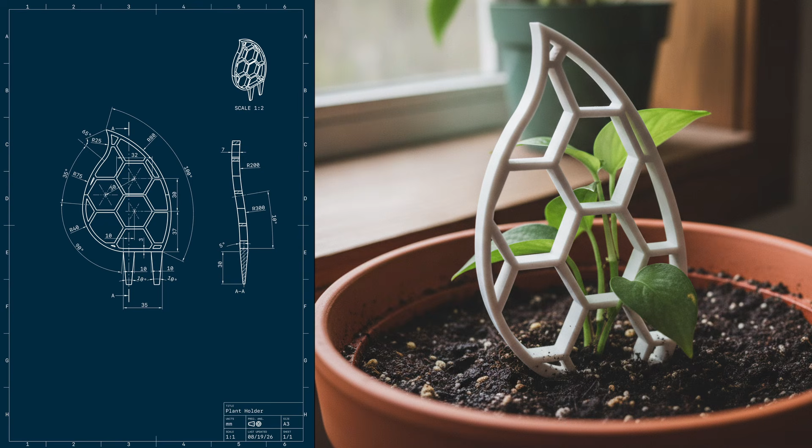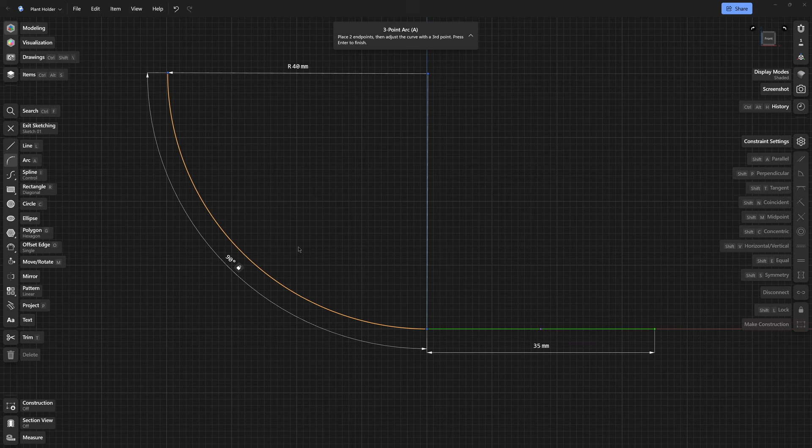First step is creating a sketch. Select a plane and select a line and draw a horizontal line of 35 millimeters. Next step is to create an arc. Let's just follow the drawing and create an arc with 90 degrees and 40 millimeters radius. Next arc is 45 degrees, 35 degrees and 75 millimeters. Next one is 65 degrees and 25 millimeters.

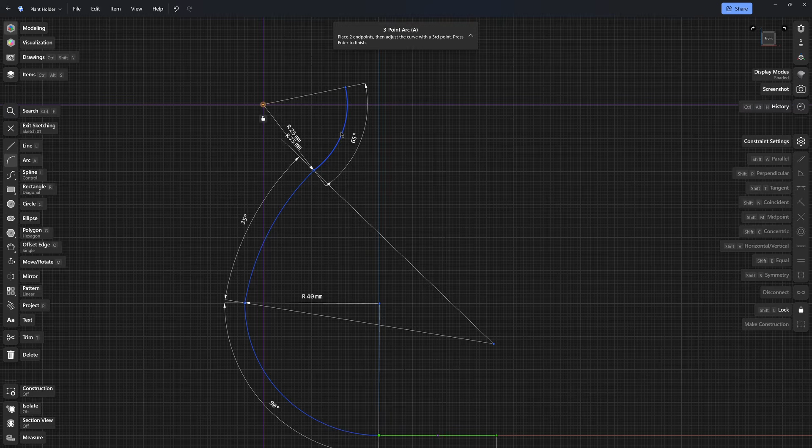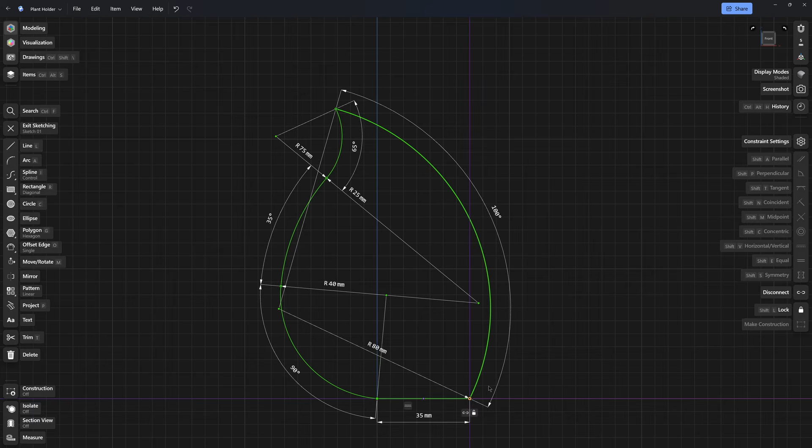And before the last one, let's add a tangent constraint. And now let's draw the last arc. It's 100 degrees and 80 millimeters radius. And now just snap the point to the horizontal line and the drawing is completely constrained. So now we can perform an extrude on this profile, create a construction plane and start a sketch on that plane.

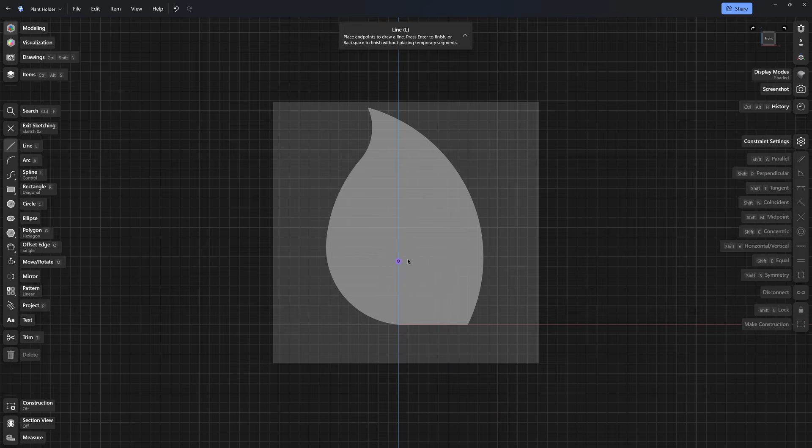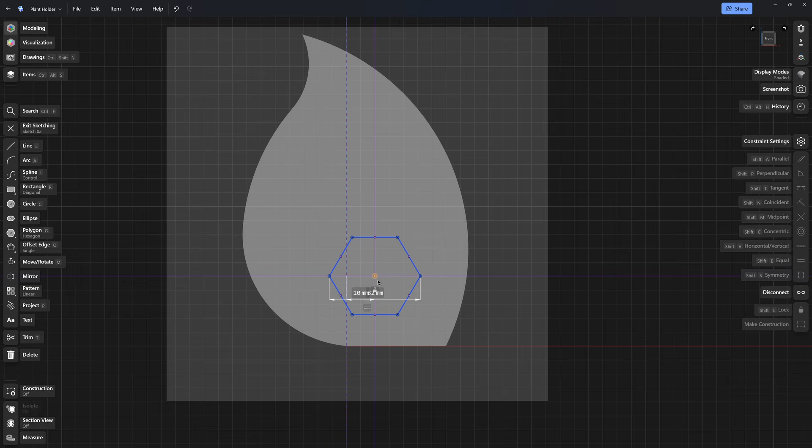We will use this sketch to create a hexagonal pattern. So pick polygon, create a hexagon and add some constraints and also dimension. It is 32 millimeters wide. And now let's define the position. So it's 10 millimeters from this edge and it's 37 millimeters from the horizontal axis.

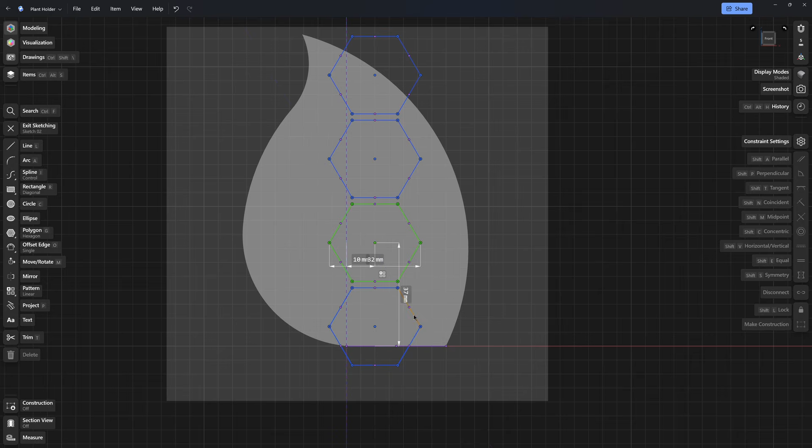Now when we have our hexagon, let's use pattern to create more of these. Distance between two hexagons is 30 millimeters. Now let's select these vertical patterned hexagons and let's start pattern again. Move the gizmo to change the direction of the pattern, and again spacing should be 30 millimeters.

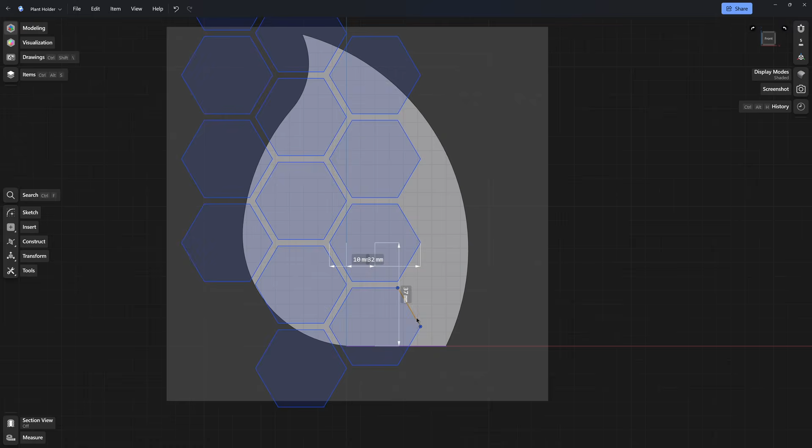There is this little room on the bottom of the leaf-shaped profile, so we need one additional hexagon, and we also need to repeat that for the right side too. So let's select hexagons, turn on pattern, change the direction of pattern and set spacing to 30 millimeters.

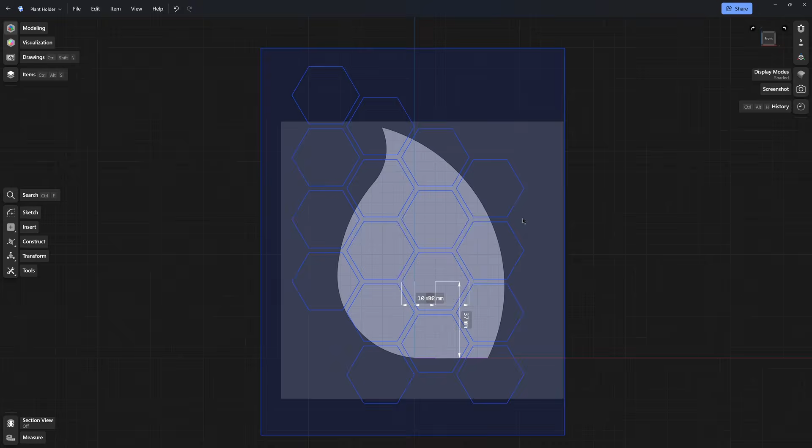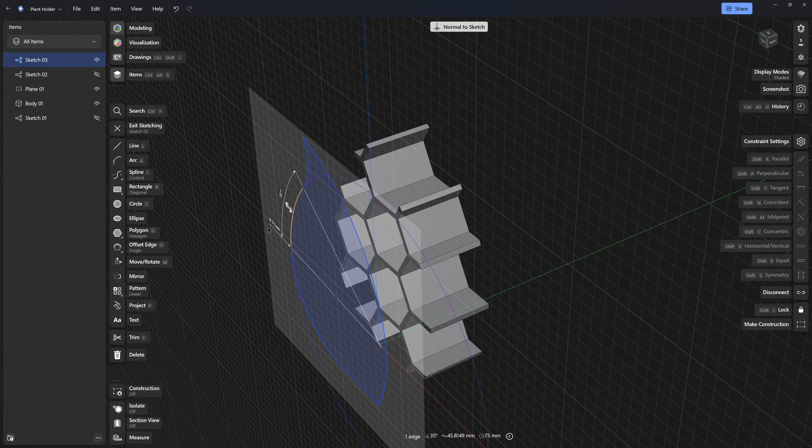After we are done with that, create a rectangle around it so it's easier for us to extrude through the body that we already created. Use Ctrl to use intersection, hide sketch so it is not in our way. Next step is to use the initial sketch and project it on the plane. Select sketch and go to offset. Change offset option to chain. So the whole profile is offset by 3 millimeters.

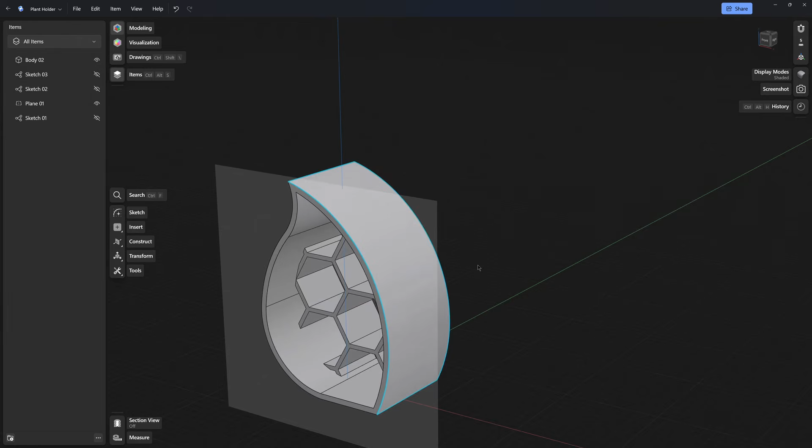When that's done, we can again extrude, but in order to avoid using union as a separate tool, we are going to use Ctrl again and union it to the existing body. Next step is to create another construction plane. On this plane we are going to sketch the side shape of the plant holder. First thing is to create a vertical construction line. So make it vertical and also set it to construction and lock it in place.

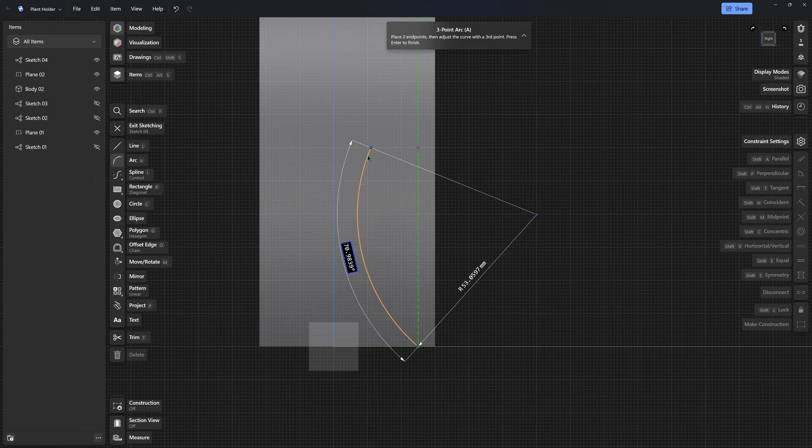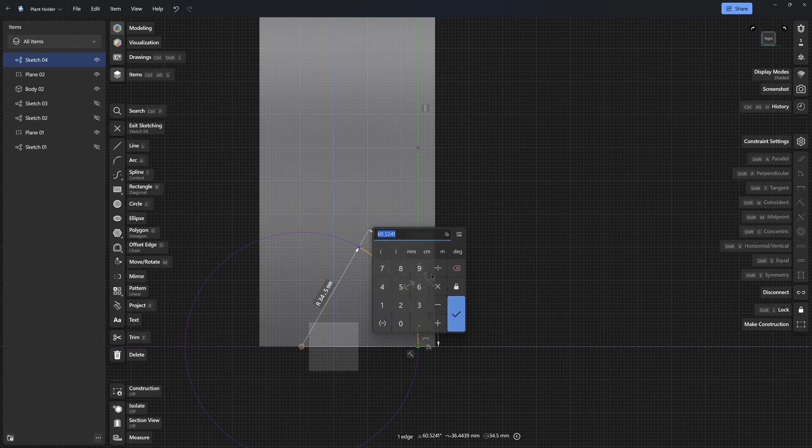Next step is to create an arc. Be careful when you snap the arc on the opposite side. It's easier to just undo and recreate a new arc than to correct the mistake. Set a constraint between the vertical line and arc and define dimensions of the arc. It's 10 degrees and radius is 300.

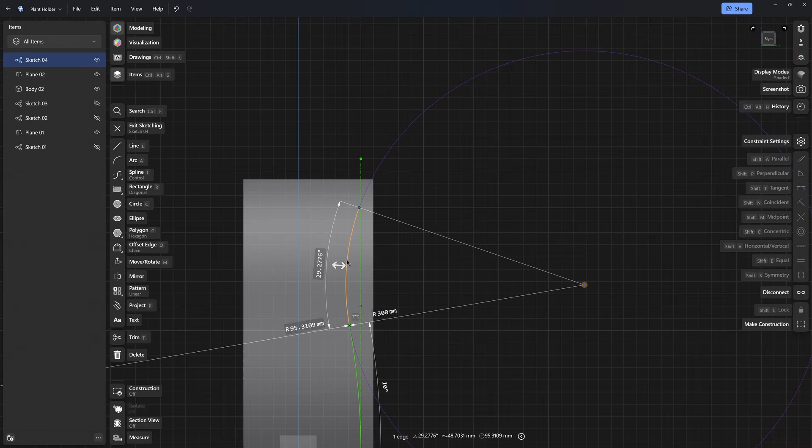And another arc should also be tangential to the previous one. So let's set that constraint and let's define dimensions. Oh, actually, the angle is not important in this case. It's only important that it is going outside of the body that we already created. So this was a mistake. It could be 100 degrees, but the important step here is to define the radius precisely.

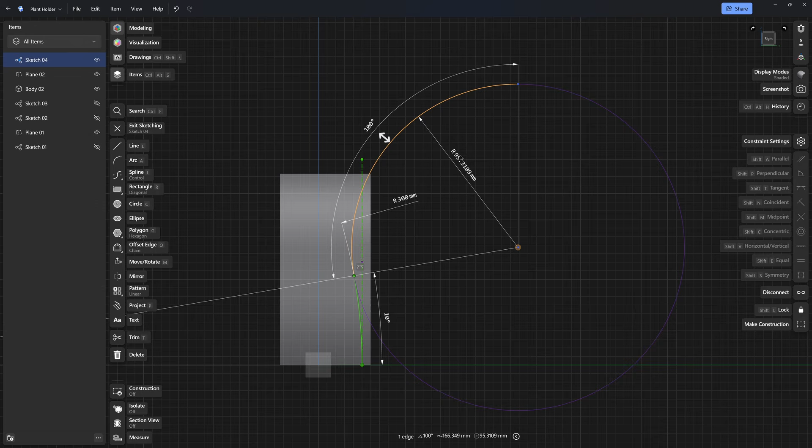So it's 300 millimeters. And now I want to offset these two arcs by 7 millimeters. But when I select offset, because it's set to chain, it will also select the vertical line. So select single and then select arcs separately and offset them by 7 millimeters. Close the profile so we can extrude it.

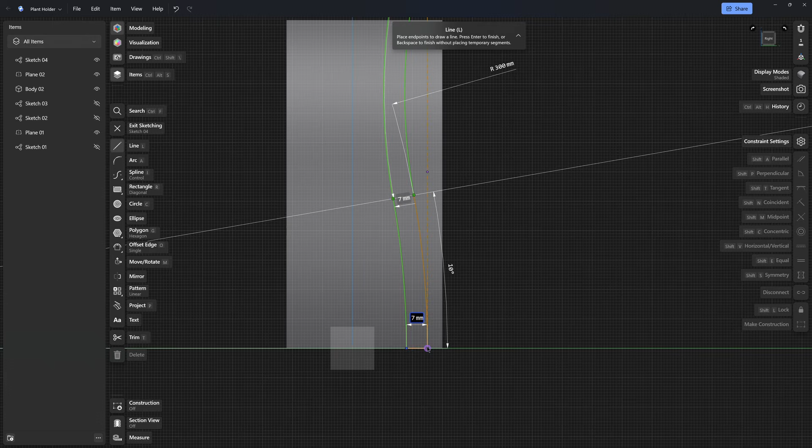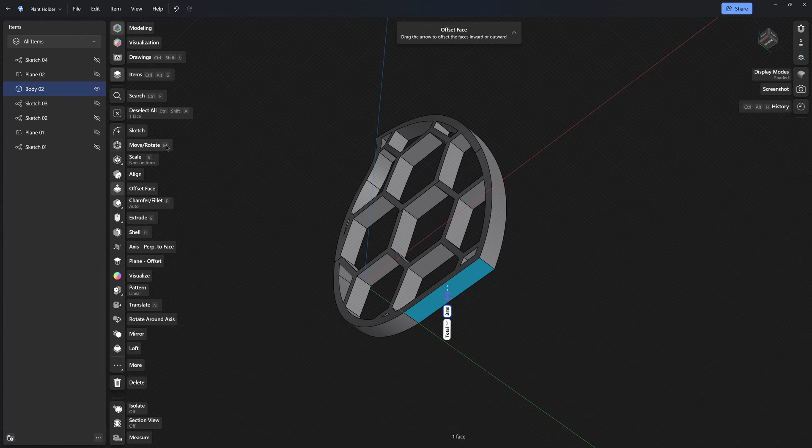Rotate the view and extrude it in the direction of the existing body. Use intersect and the hardest part is done. We have a leaf-shaped plant holder. We just need to add spikes on the bottom of it. Start the sketch, use a rectangle and its width is 10 millimeters. Snap it to the bottom edge so it is completely constrained and do the same with the right side.

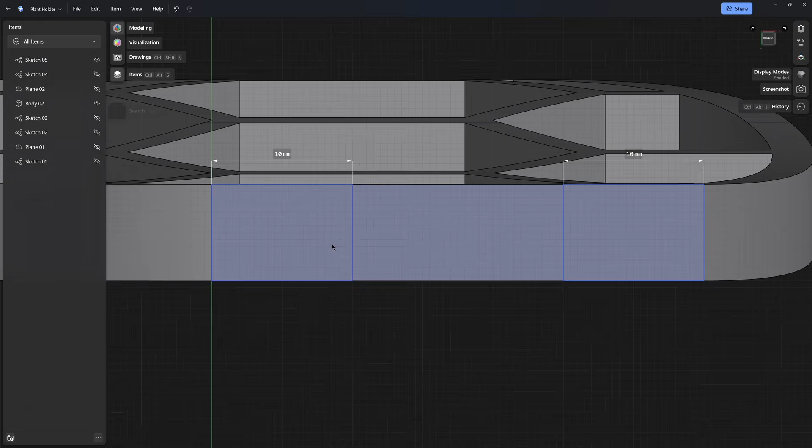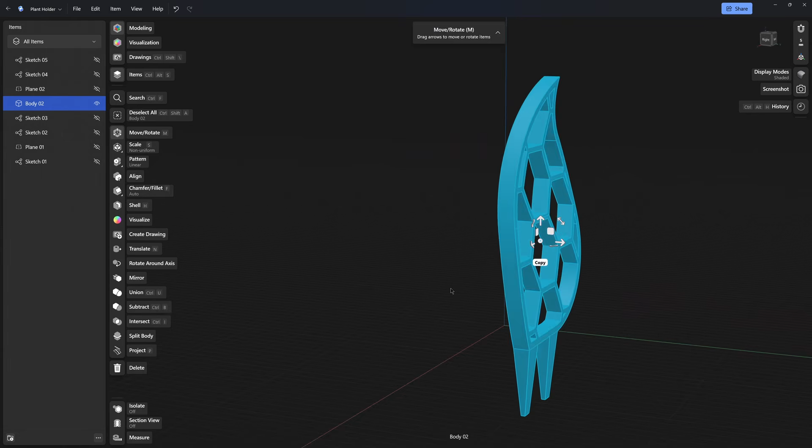Select the two created profiles and extrude them by 30 millimeters. And we are going to also use the draft tool and set it to 5 degrees. And as you can see, this is the completed model. It is only one body, which was the goal, and we only used extrude as a tool. There is the volume and you can compare that volume to your solution too.